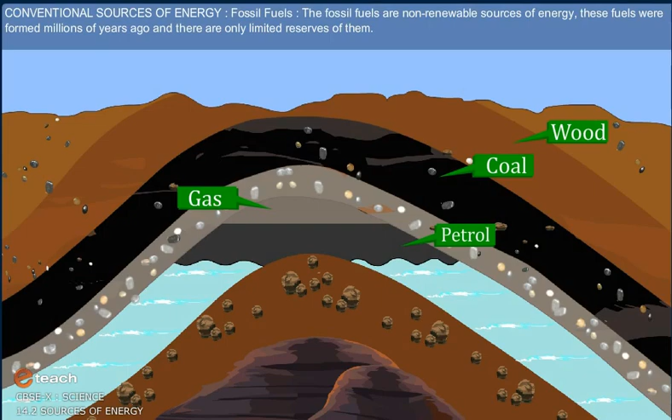Conventional sources of energy, fossil fuels, are non-renewable sources of energy. These fuels were formed over millions of years ago and there are only limited reserves. Since fossil fuels are non-renewable, we need to conserve them. If we continue consuming these sources at such alarming rates, we would soon run out of energy. Wood, coal, and petroleum are some examples of fossil fuels.

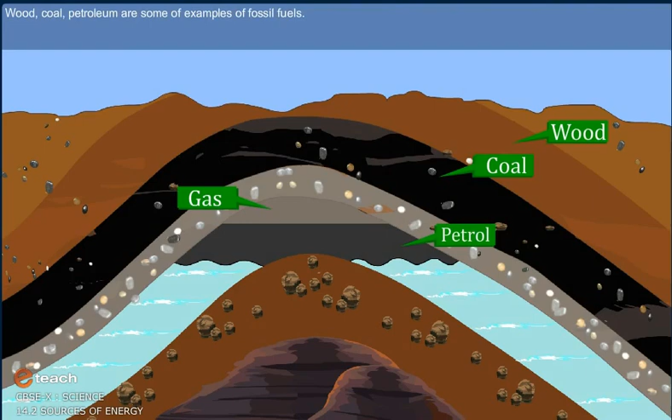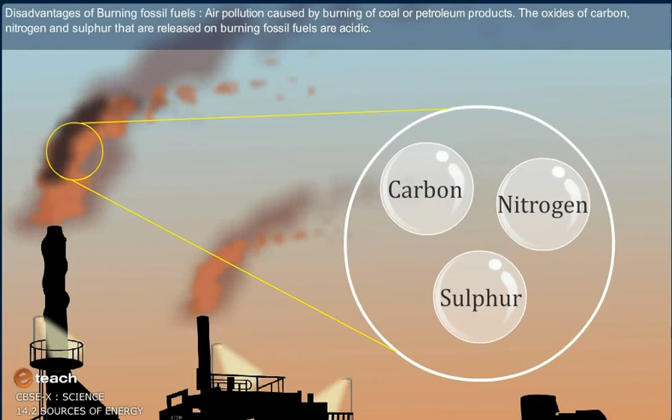Disadvantages of burning fossil fuels: air pollution caused by burning of coal or petroleum products. The oxides of carbon, nitrogen and sulfur released on burning of fossil fuels are acidic. These acidic oxides lead to acid rain, which affects our water and soil resources.

To overcome these disadvantages, besides being used directly for various purposes in gas stoves and vehicles, fossil fuels are mainly used for generating electricity.

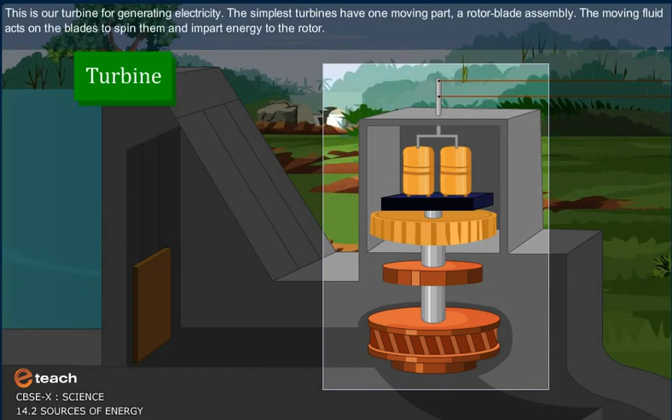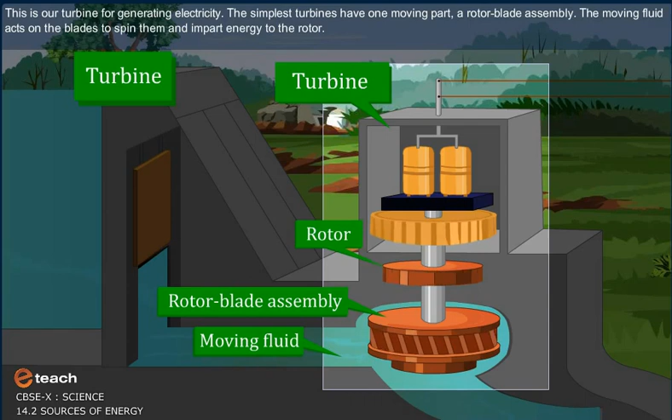This is our turbine for generating electricity. The simplest turbines have one moving part, a rotor blade assembly. The moving fluid acts on the blades to spin them and impart energy to the rotor. The shaft of the turbine is attached to the generator shaft, which rotates the rotor of the generator at high speed, thus converting mechanical energy into electrical energy.

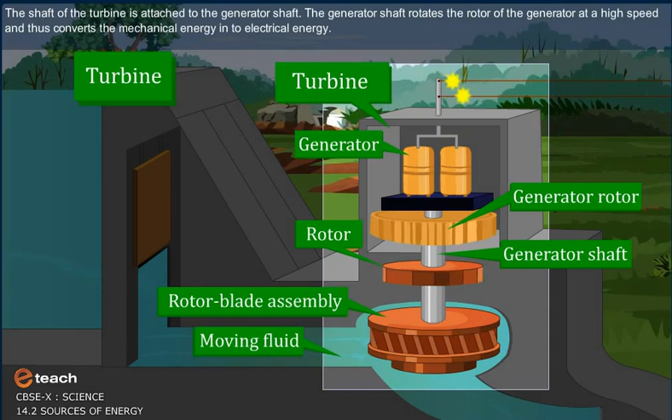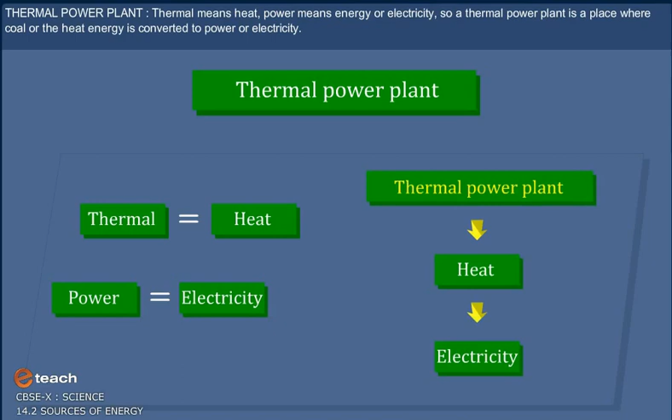Thermal power plant: thermal means heat, power means energy or electricity. So a thermal power plant is a place where coal or heat energy is converted to power or electricity. We know the capacity of power plants as MW, where MW stands for megawatts of power generated.

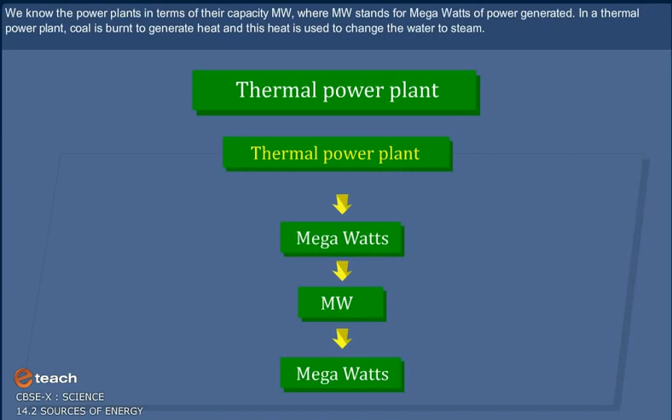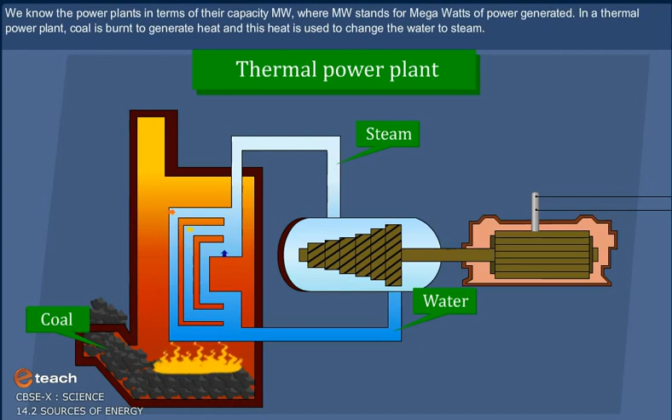In a thermal power plant, coal is burned to generate heat, and this heat is used to change water to steam. The force of steam rotates the turbines, which are connected to a generator that converts the mechanical motion of the turbine to electrical energy. This generated electrical energy comes to our homes through a set of electrical structures.

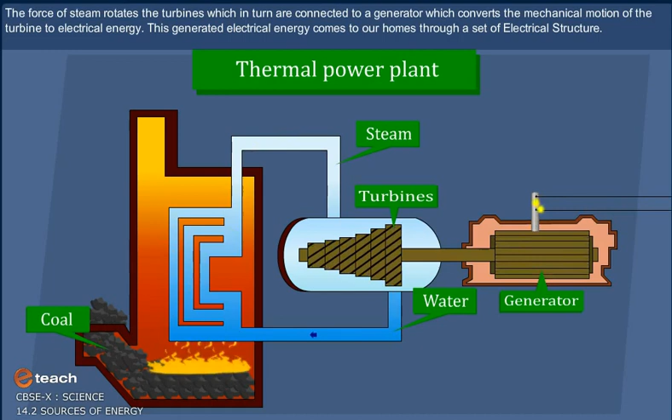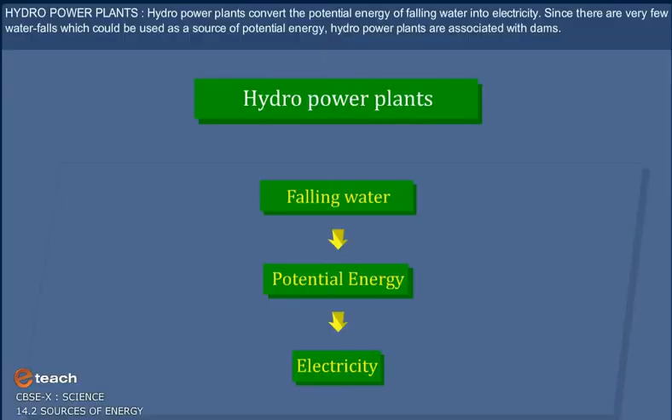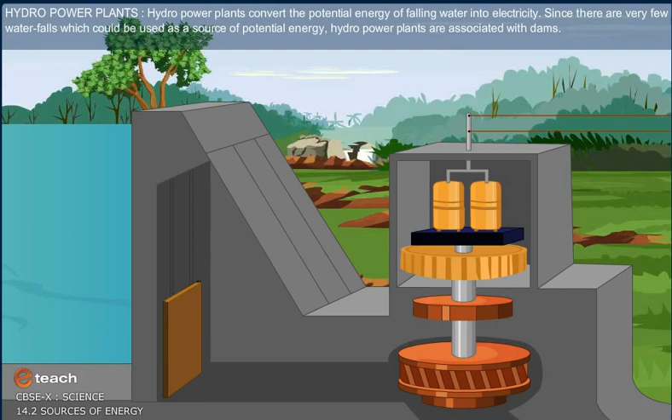Hydropower plants convert the potential energy of falling water into electricity. Since there are very few waterfalls that could be used as a source of potential energy, hydropower plants are associated with dams. To produce hydroelectricity, high-rise dams are constructed on the river to obstruct the flow of water and thereby collect water in larger reservoirs.

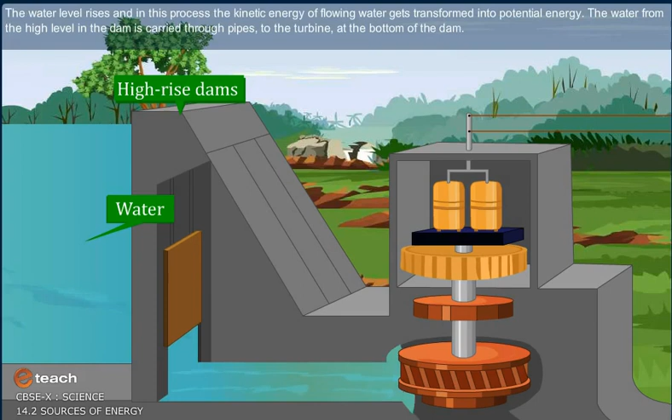The water level rises, and in this process, the kinetic energy of flowing water gets transformed into potential energy. The water from the high level in the dam is carried through pipes to the turbine at the bottom of the dam.

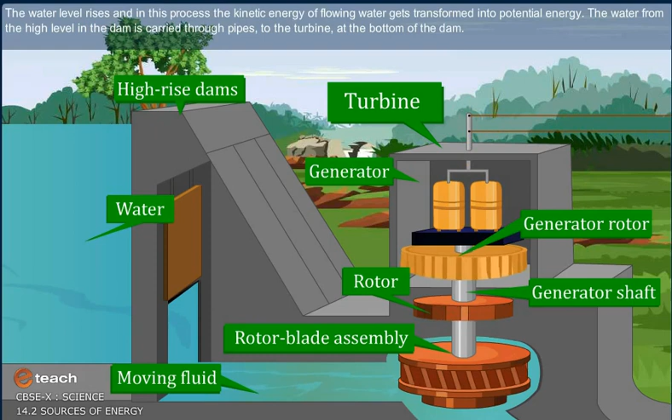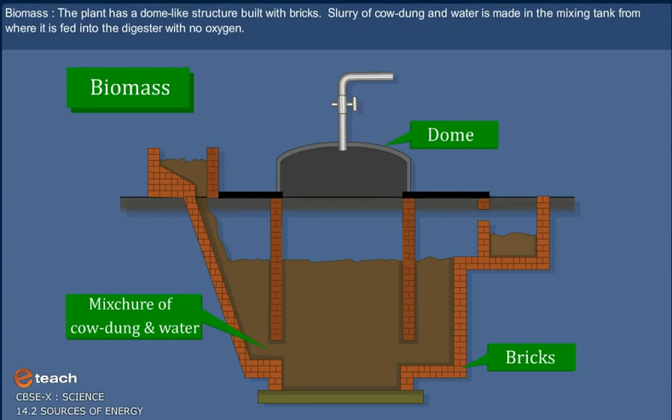Biomass: the plant has a dome-like structure built with bricks. A slurry of cow dung and water is made in the mixing tank, from where it is fed into the digester with no oxygen. A few days later, due to the decomposition process, gases are generated like methane, carbon dioxide, hydrogen, and hydrogen sulfide. The biogas is stored in the gas tank above the digester, from which it is drawn through pipes for use.

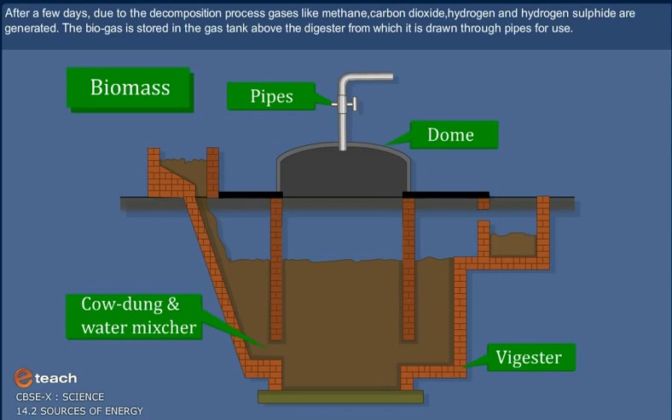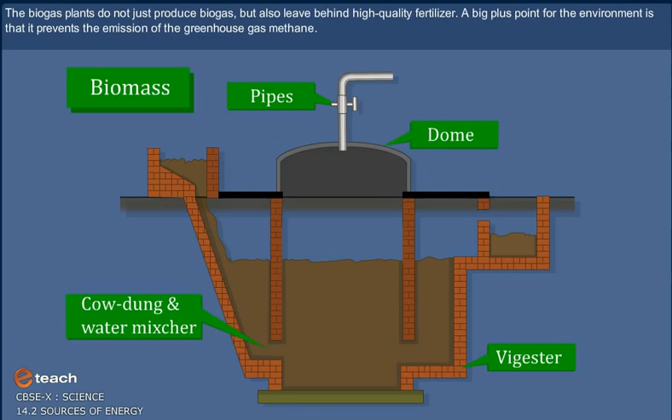Biogas plants not just produce biogas but also leave behind high quality fertilizer. A big plus for the environment is that it prevents the emission of the greenhouse gas methane.

Windmill: the kinetic energy of the wind is used for generating electrical energy. Today, wind energy is also used to generate electricity.

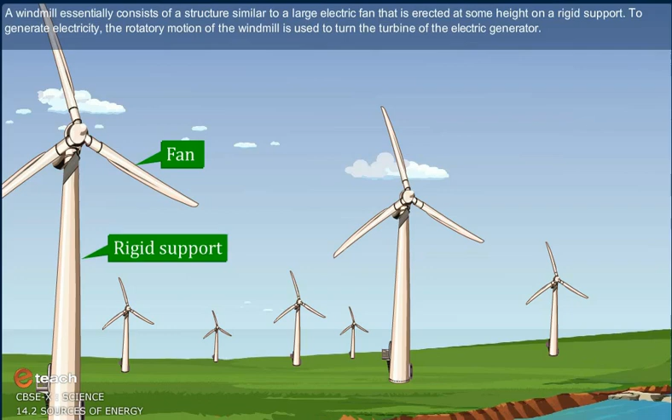A windmill essentially consists of a structure similar to a large electric fan that is erected at some height on a rigid support. To generate electricity, the rotatory motion of the windmill is used to turn the turbine of the electric generator. The output of a single windmill is quite small and cannot be used for commercial purposes.

Therefore, a number of windmills are erected over a large area, known as a wind energy farm. The energy output of each windmill in a farm is coupled together to get electricity on a commercial scale. Wind energy is an environment friendly and efficient source of renewable energy.